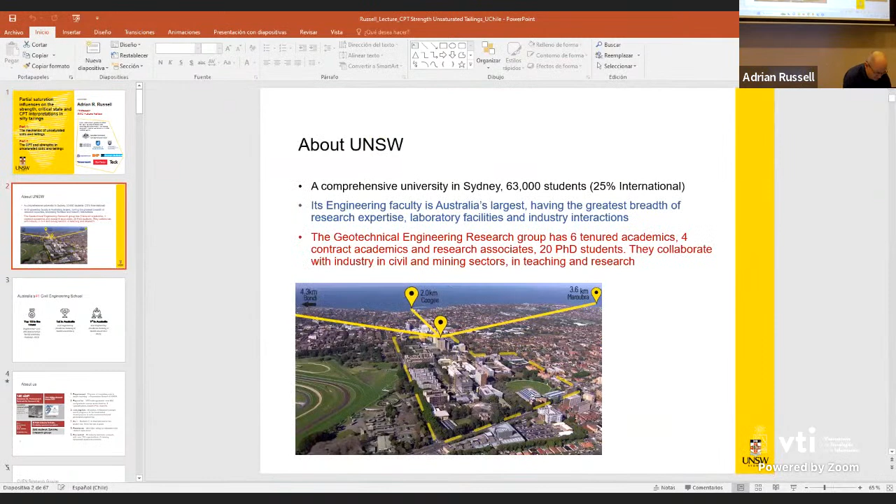So I'll make this full screen. My university, the University of New South Wales, is in Sydney. We have around 63,000 students. This is typical of a big university in Australia, 25% international, and it started as an engineering university, so civil engineering is one of the foundation schools of that university. It's very near the beach in Sydney, so it's a very nice place to visit, and you're all very welcome.

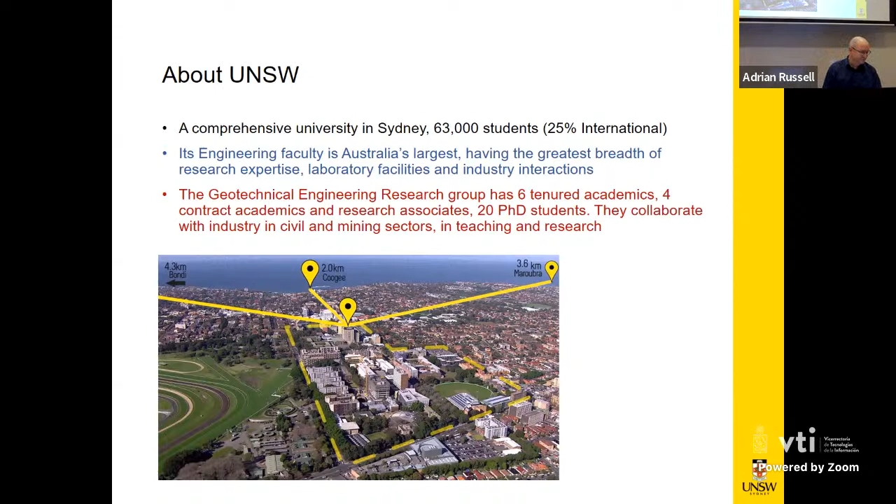We are very proud of our rankings. Globally, we are consistently first in Australia for civil engineering, and usually in the top 20 in that discipline according to the various rankings as well, in the world.

The university is quite young, it's 73 years old, but our school is quite big. We have 1,600 undergraduate students, 800 master's students by coursework, and around 200 PhD students. In the geotechnical engineering group, we have around 6 tenured academics and some others as well. We focus on several research areas, but the ones we're most famous for are unsaturated soil mechanics, that's number 1, and also number 5, our numerical analytical modelling expertise, which is also very highly regarded internationally. We also work in other areas as well.

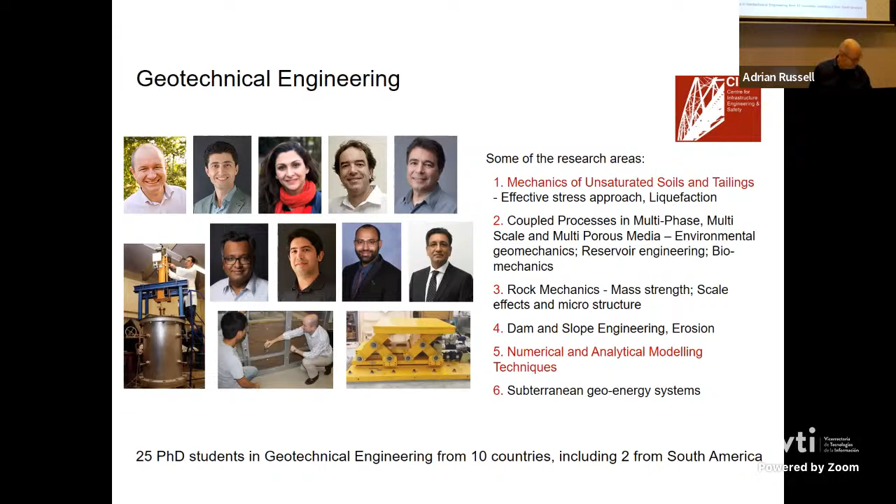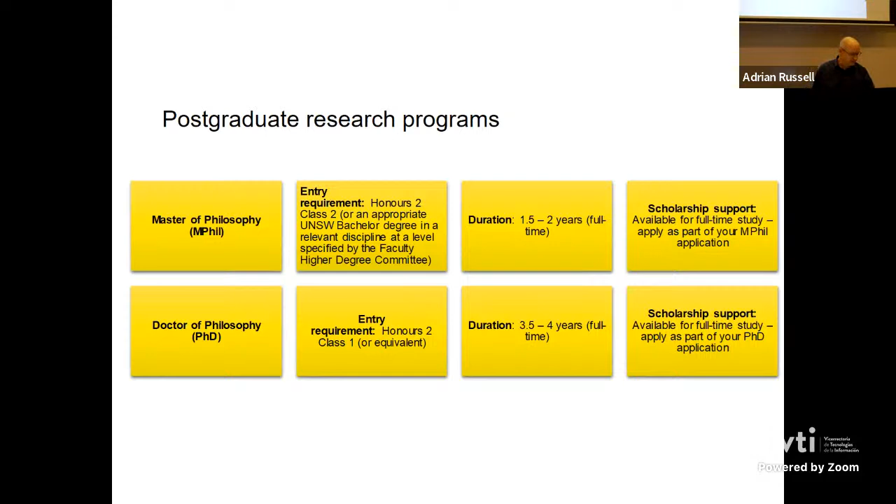In the geotechnical engineering group, we have around 25 PhD students from 10 countries, including South America, and more are always welcome, so please reach out to us if you would like to come and visit. Our PhD program is normally 3.5 or 4 years, but students need an honours 2-1 or a first class honours degree to come in. We also have a Masters by Research program, much shorter, only 2 years, but we can also do partnership-type research with other universities. So you're always welcome, it's a nice part of the world.

So let's get on to the technical side of the talk. I'll talk about what unsaturated soils and tailings are, and highlight why research on this is very important in the context of tailings. Then I'll go through some of the methods we use: the effective stress, strength, suction hardening, water retention, and what you can do in practice to apply these concepts very easily.

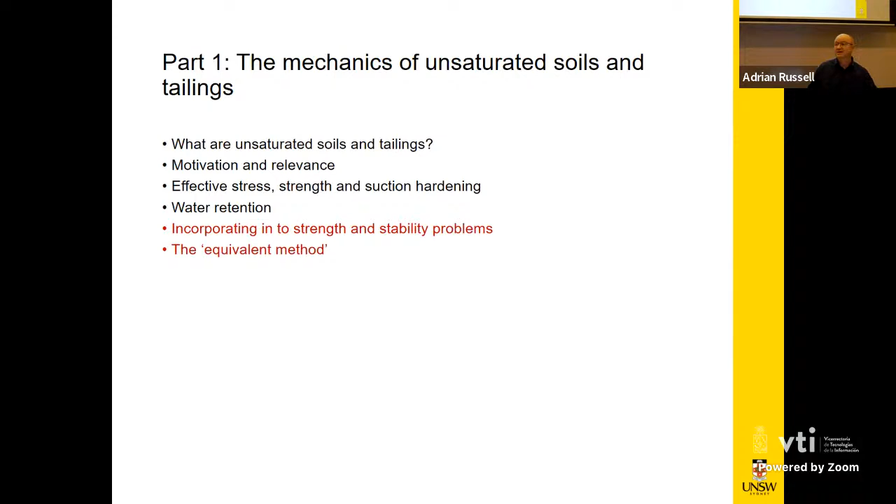So an unsaturated soil or tailings is one where you have solid particles plus air and water in the pore space. They are widely dealt with and encountered in many civil engineering applications - slopes, dams, compacted soils - but also in the mining sector: ores, tailings deposits, dry stacks are always or usually unsaturated.

The behaviour is influenced by suction as well as the presence of air in the pore space. Those two things do different things to the way the tailings behaves. Suction, for example, is a capillary action and it pulls particles towards each other, increasing contact forces. It increases the effective stress and it increases the strength.

The presence of air also has a significant but quite separate influence. It means that the tailings is compressible during a fast deformation event. Air is very compressible, much more so than water. So when you have some inside the pore space and you push a cone through it, you cannot assume a constant volume condition. This applies during cone penetration testing or any fast deformation event like an earthquake or leading up to liquefaction. You get volume change, and that's very important.

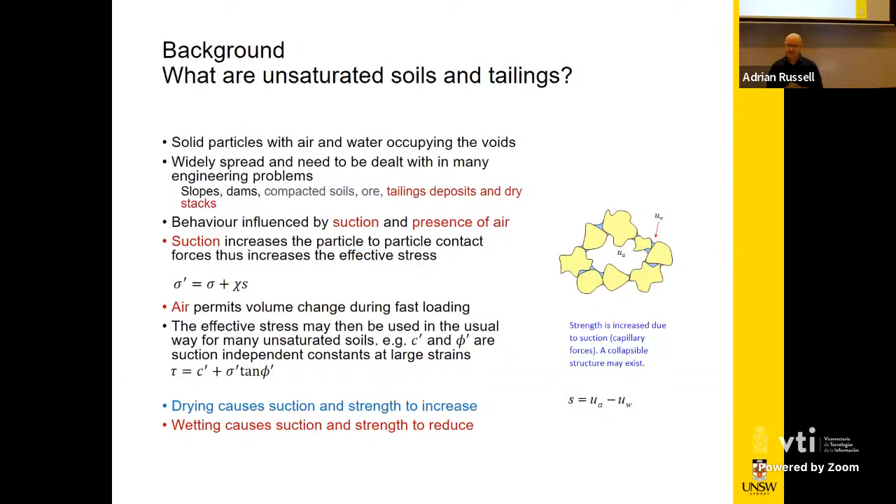Suction is caused by a difference between the pore air pressure and the pore water pressure. The air pressure is always larger than the water pressure, and they come into equilibrium through a curvature of the air-water interface. The difference between the two is what we call suction. Air pressure is usually atmospheric pressure, so the water pressure is negative - it's in tension, and it literally, through this interaction, pulls the particles towards each other, increasing contact forces. There are many obvious examples where you can have a negative water pressure through this capillary action, and this is something you can see in the laboratory.

If you have a large diameter glass cylinder where the water pressure is just hydrostatic, so from that red line and below, the water pressure increases with depth. But in the small diameter tubes, the curvature of the water surface pulls the water upwards and holds it in tension in this region here. And then once you reach this level of the large diameter tube, the water pressure is zero, and then it becomes positive below that line.

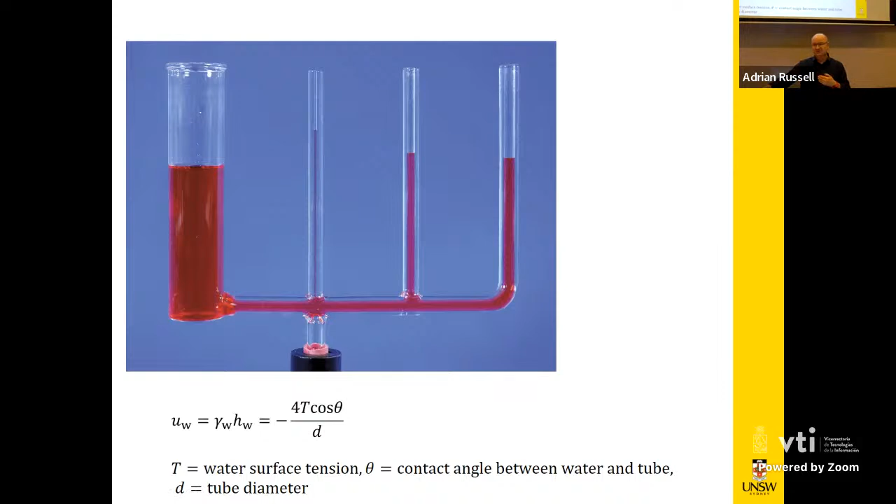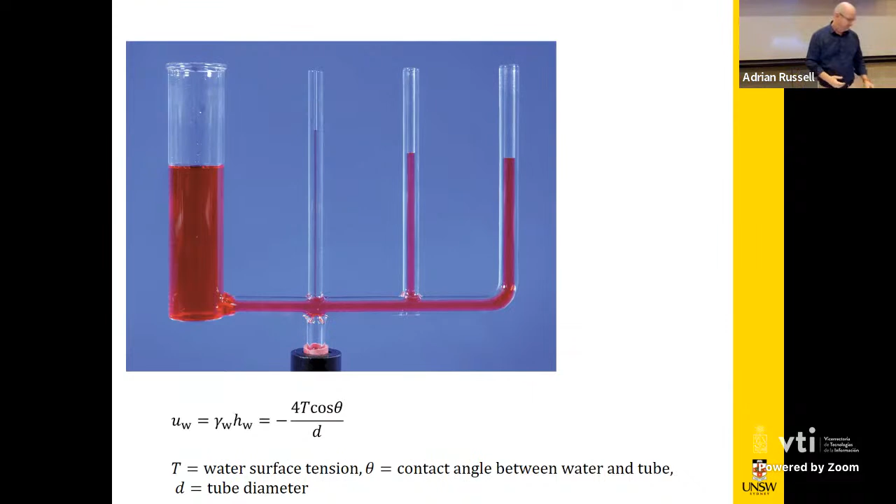And the same thing happens inside a soil or a tailings. There are places where the water is in tension through this capillary effect. So partial saturation is very important inside tailings storages. Tailings we like to dry out as much as possible, sunshine, and that increases the effective stress and the strength. But then if you deposit more tailings on top and build your structure up and up so it goes higher, you can have these buried sections where the tailings is partially saturated. And when you do your cone penetration through the structure, you can be pushing through these unsaturated sections.

And obviously above a phreatic line as well, you can expect to have partial saturation in significant sections of that. To give you an idea of scale, in a 30-metre high tailings impoundment, you can have a phreatic surface that might be 10 metres below ground surface. So you can have maybe 5 or 10 metres above that where it's partially saturated. And even below that line, there can be another 10 or 15 metres of different localised areas where you have partial saturation. These sections near the embankments especially are critical to stability, so they need to be characterised and dealt with in stability analysis to get an accurate answer.

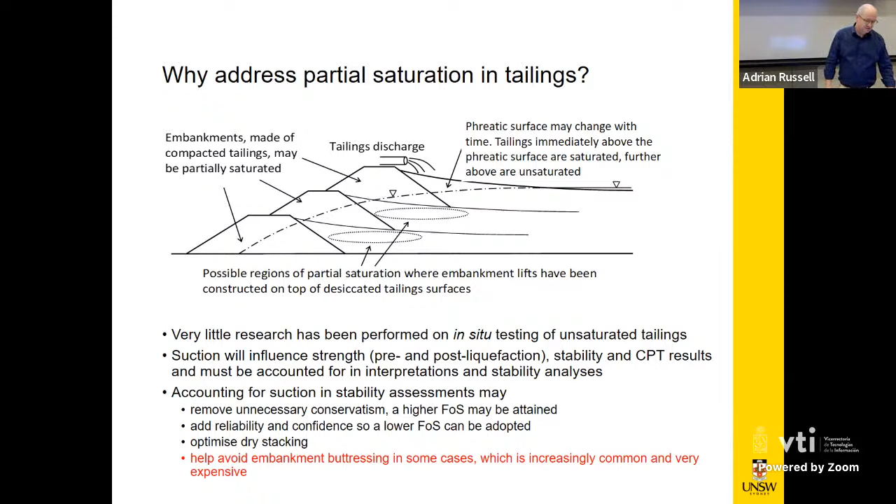Buttressing is becoming a common solution in the mining sector to minimise the risk of failure of these structures. But I'm wondering if the engineers who are designing these buttresses have properly accounted for the suction inside the tailings dam, because what it does is elevate the strength and increase the factor of safety. And I know in many cases they haven't done this fully, so they're perhaps designing a buttress that is bigger than what it needs to be, or perhaps unnecessary entirely. So it's important to put that unsaturated soil mechanics into the analysis to get a cost-effective and accurate solution.

So here's an expanded form of the effective stress. Suction is the difference between pore air and pore water pressure - there's that chi parameter. But we also have an air pressure part over here on the left. So we have a total stress minus the pore air pressure, and we call that a net stress. Normally the pore air pressure is atmospheric, and we take that as our datum, so it is zero. But sometimes that air pressure increases and we have to account for that. So you need to be aware of this full expression.

For dry conditions, the suction disappears and you just have the usual equation where your effective stress is equal to the total stress. For a saturated condition, chi is 1, there's no air present, and your effective stress equation becomes identical to what we use routinely in undergraduate engineering. And then for unsaturated conditions, you have this net stress plus chi-s as our effective stress definition.

Sometimes chi is approximated to be the degree of saturation. That is reasonable sometimes. In other times, it's a very bad approximation. So just be very careful of doing that.

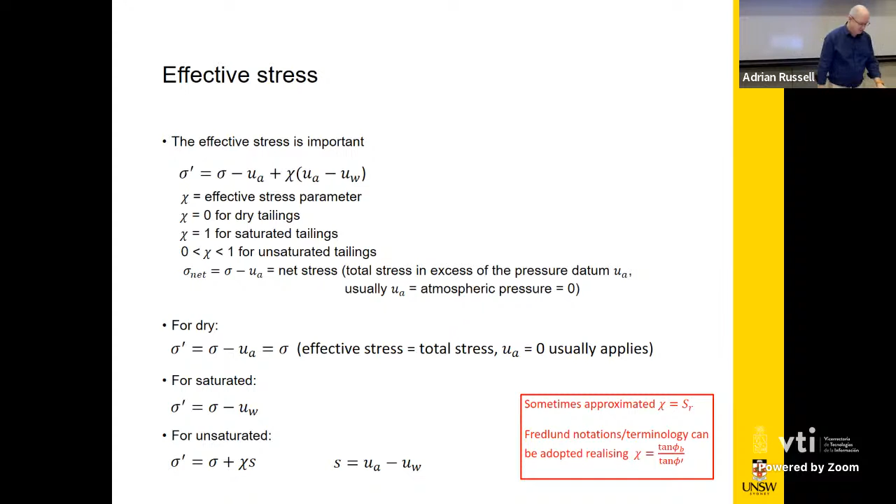Now, here's some typical stress strain responses of a decomposed granite when it's saturated and unsaturated, and this highlights what suction does. The first lines I want to show are these - let me put a pointer - this one here. These are for saturated, loose samples. You get the classic smooth increase in stress with strain, no surprises there, and you get volumetric compression as you shear the sample. The void ratio of those tests was around 0.4.

Now, these other two samples are for when the void ratio is a little bit higher, around 0.47, but they are now unsaturated. They have a suction of 50 kilopascals. Look what happens - you get now a very different response. You get a peak strength and then some softening, and it's looking much like a dense material, even though it's looser than those saturated tests we talked about to begin with. And that is due to a phenomenon called suction hardening.

Suction doesn't just increase the effective stress, it also hardens the soil fabric through a shift of the normal consolidation line or the critical state line. So it does two things to the mechanics.

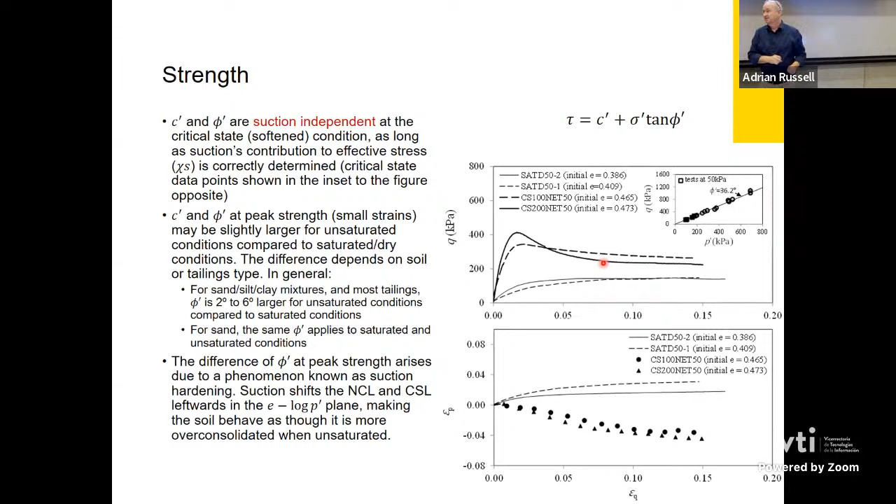This is the suction hardening phenomenon here. This is the saturated normal compression response, for example, initially quite stiff and over-consolidated, and then you move on to your normal consolidation line. When it's unsaturated, same sort of thing happens, initial stiff response, but the normal consolidation line is now over here to the right.

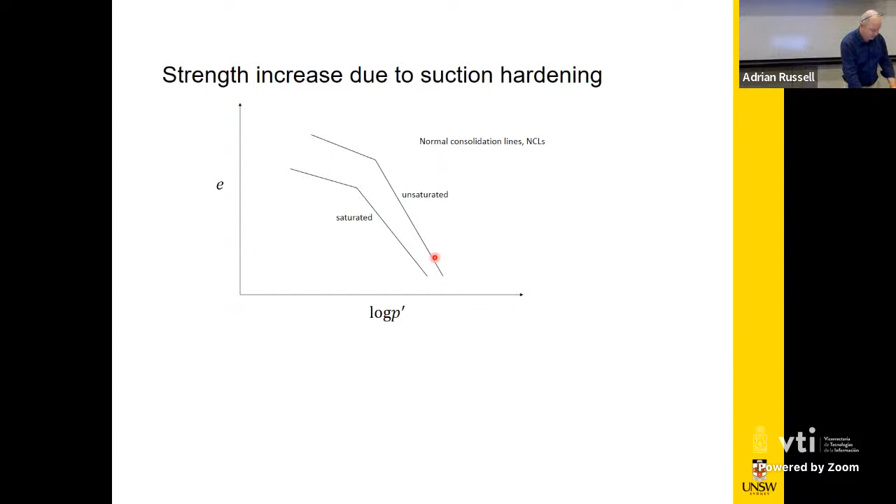It has moved due to suction hardening. Hardening controls the size of the yield surface, so your yield surface now has become larger through this phenomenon and the shift of the normal consolidation line. And we see the same with our critical state lines - they also move due to the presence of suction by the same amount as your normal consolidation lines.

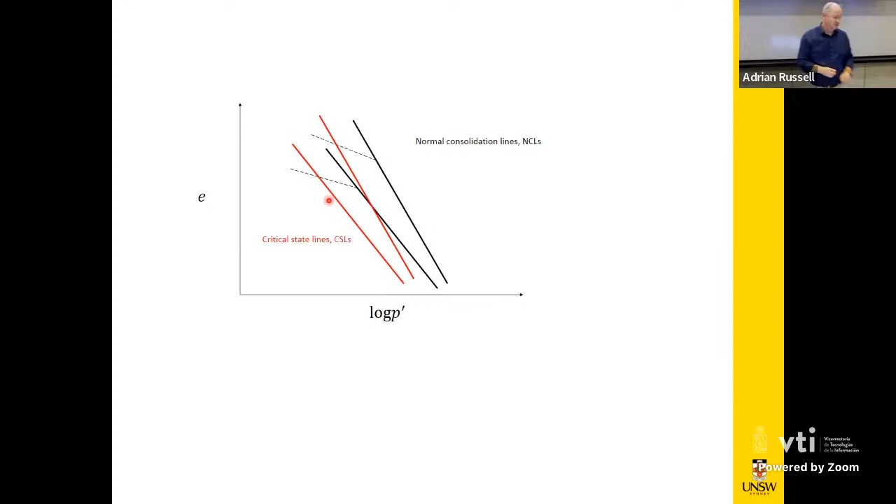So you need to put this into a mechanical framework to deal with it. These are some real critical state lines for two tailings on the left-hand side there. The saturated critical state line is through here, but when suction is present, and this is a suction ratio of 50, the line shifts quite far upwards and becomes steeper. And then as suction increases further again, it moves. So you get this suction-dependent location of the critical state line, and another example is just shown below there.

So this takes sophisticated and specialist laboratory testing to characterize, and we're very mindful that that is not routinely done in practice. So we try and give advice and guidance that doesn't require this to be incorporated into the mechanics, but sometimes it's unavoidable.

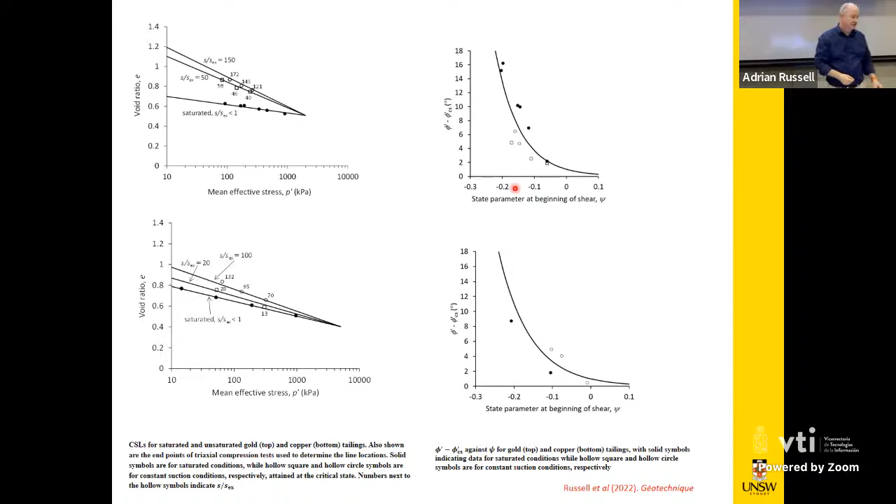These are just some strengths in excess of critical state against state parameter, and you can see that the saturated and unsaturated responses are more or less following the same trends - this is the Been and Jefferies state parameter. But the critical state line used in its definition is the shifted critical state line. So again, it's difficult for a practitioner to quantify the state parameter of an unsaturated material.

Now, determining Chi-S, which controls effective stress and strength, is important in stability problems. It requires knowledge of what we call the water retention curve or the soil water characteristic curve. This is a signature of any soil or tailings and is one of the first things that we try and measure in a laboratory. It tells us a lot about the mechanics of the material.

Generally, when you have a saturated material, degree of saturation of 1, as we increase suction, it stays saturated more or less until you reach a critical suction value called the air entry value. That is the suction value large enough to break the capillary bonds or capillary forces that exist between the soil particles and enables air to enter the system. Then it rapidly desaturates as you increase suction more and more.

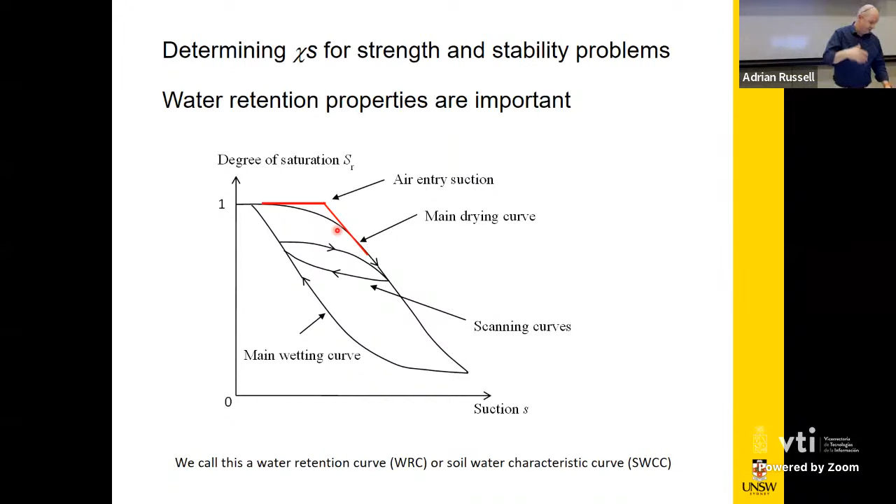But if we get to some point here and then wet the material, so reduce suction, it moves along what we call a scanning curve and then intercepts the main wetting curve and rapidly moves up to a nearly saturated condition. So we have a main wetting curve down here, a main drying curve, which is out on the right side bounding all the data, and then a whole lot of scanning curves that zigzag back and forth between the two as you transition from wetting and drying through normal seasonal moisture variations or some prolonged wetting or drying events.

But the beautiful thing about tailings and many soils, for that matter, is when you take a double log of the degree of saturation versus suction, you see straight lines form. That simplifies the mathematical expressions for these water retention curves, and that's what I've been using through all this research.

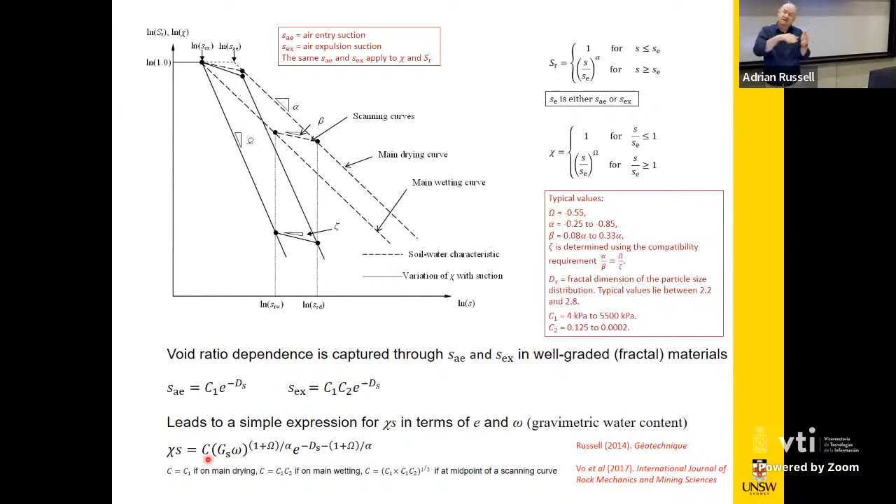But what these expressions let us do now is do some mathematical manipulations and show that chi-s, for example, can now easily be determined using knowledge of the gravimetric water content and void ratio. All these exponents are now just slopes of these different curves in this plane. The multiplier C depends on whether you're on the main drying curve, so you're undergoing a drying event, or the main wetting curve, if the material's been wetted, or sometimes if you're halfway between. For example, if you're exactly halfway between the two, this is what that constant would be.

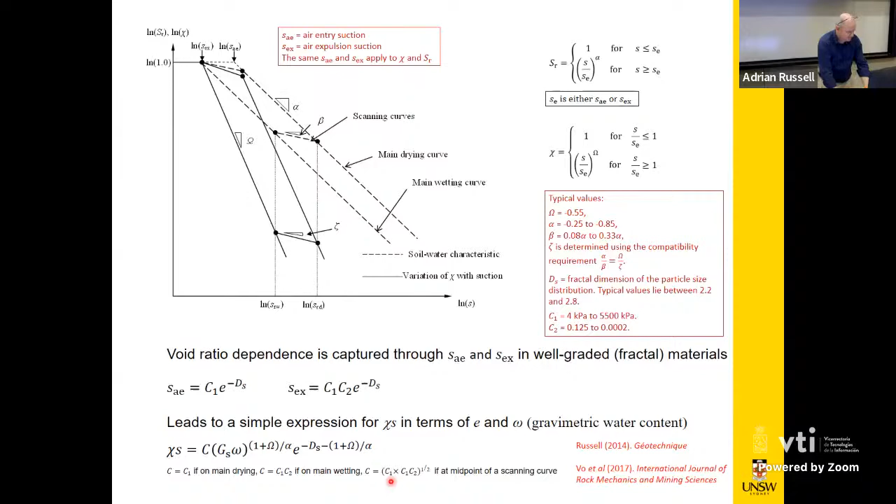What is a fractal? Well, it's a special pattern to the grain size distribution that is formed naturally by decomposition of rock, or it is formed artificially by crushing and grinding processes. And sometimes nature just has crushing and grinding involved anyway.

So you have this sort of procedure that results in a particle size distribution where you have a very well-graded material and the particles can become perfectly packed. You can have the big grains, and then in between them, the next biggest grains are inserted into the void spaces. Then in the spaces that remain, you insert the next possible biggest grains and repeat all the way down, and you end up with this fractal distribution of grain sizes.

How do you know if you've got a fractal in your soil or tailings? Well, you take the double log plot of percentage passing and grain size, and if you see a linear segment for at least about 2 log scales, then you've got something that's a fractal or very close to it. The slope of that line in the double log plot you can easily determine, and then 3 minus that slope gives you your fractal dimension.

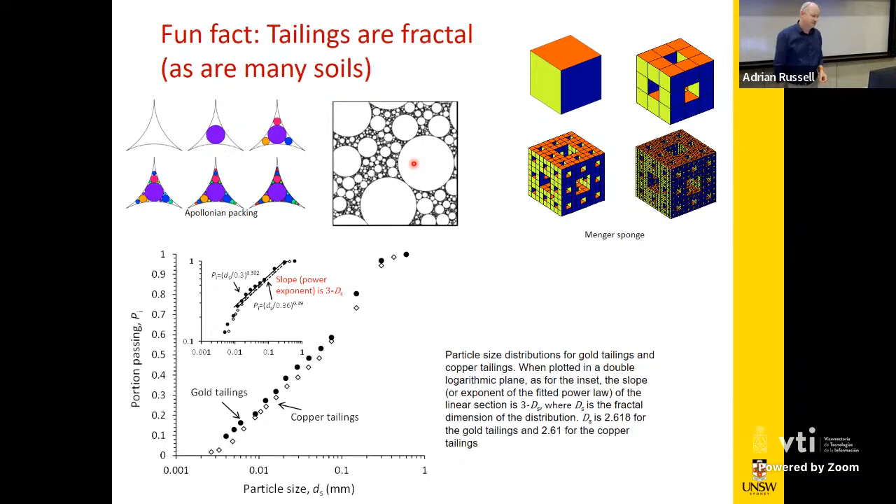I just learnt today that Santiago gravel is a beautiful soil that you have to deal with here all the time, and it happens to be a perfect example of a fractal soil. I did this just an hour ago: I plotted percentage passing against particle size for your Santiago gravel, and notice in the double log plane, you get almost a beautiful, perfect straight line. The slope is 0.44, so the fractal dimension of your Santiago gravel is around 2.56.

So it looks something like this image in the bottom left, and I'll come back to that at the end of the presentation with some other estimations. I'm guessing this material is from the mountains, but it's alluvial. But what turns the rock into soil in the first place? Maybe there's some grinding process through glacial action or landslides coming down or something, and that process, that grinding and churning up of the soil, has caused it to be perfectly fractal, and then the water has just deposited it.

Yeah. They compact very, very easily. They're very easy to work with. Decomposed granites all over the world are fractal as well. Anyway...

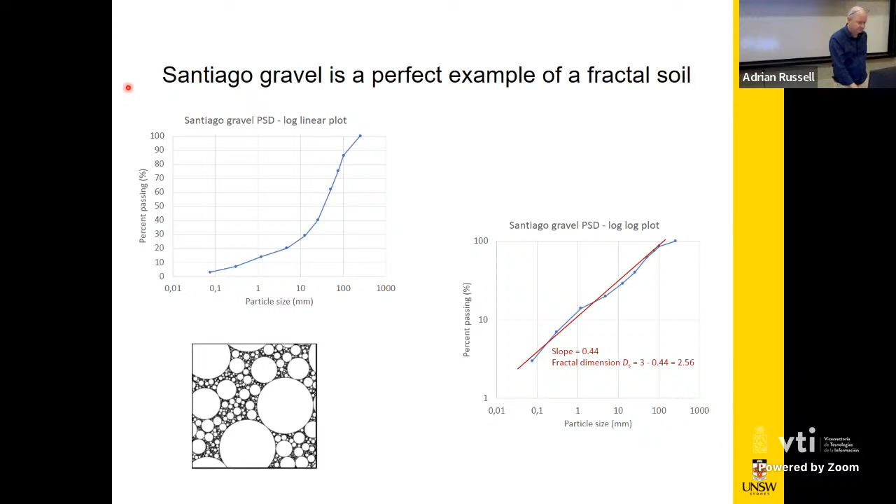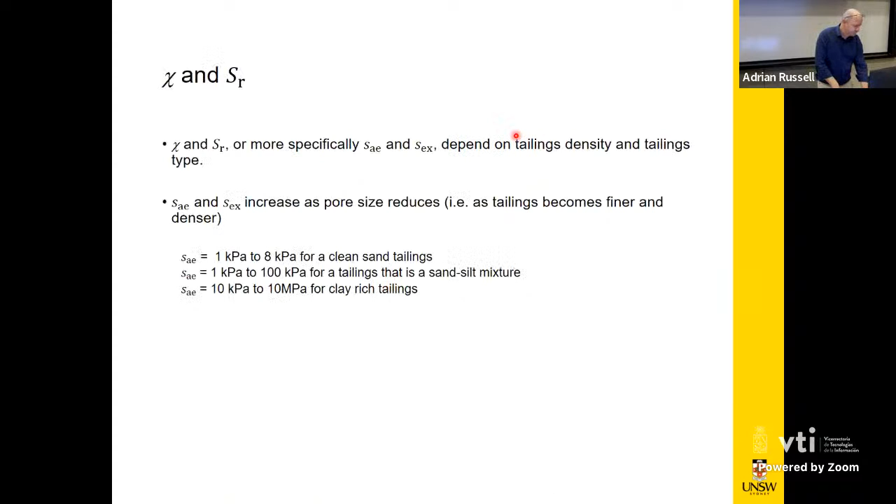We can jump ahead of that. Okay, so let's now imagine this material deposited in a tailings dam or impoundment.

You can have a phreatic surface. Below that, everywhere your water pressure increases linearly with depth, hydrostatic. But immediately above the phreatic surface, through capillary action, the water is sucked up into the pores and is held in a more or less saturated state, but in tension. So you can have a negative hydrostatic water pressure, and the extent of that capillary rise section depends on your air entry value divided by the unit weight of water.

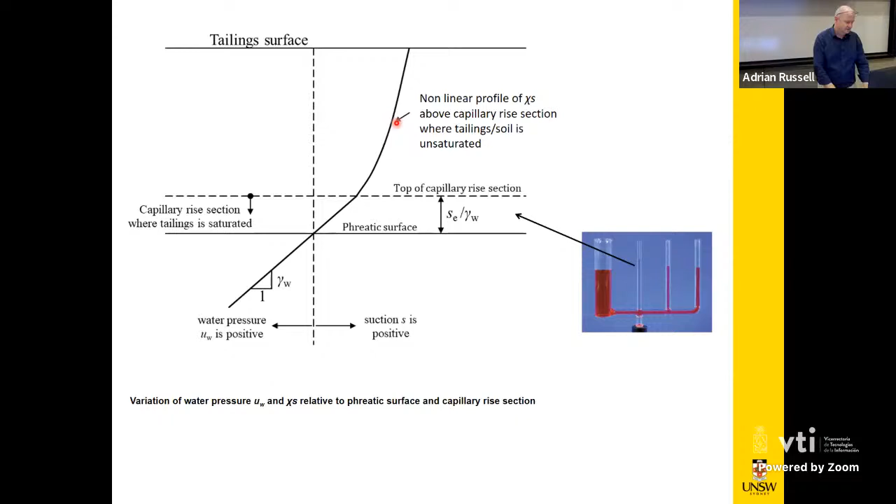If it's caused by a drying process, that is, if your phreatic surface is gradually lowering, you're gradually drying out the tailings, it's the air entry suction that controls the height of the capillary rise. Conversely, if you're wetting the soil, for example a rise of the phreatic surface or some rainfall event, the wetting means that the air expulsion value is critical in the height of the capillary rise. Immediately above that, it deviates from linearity, and you have a chi-S profile that is also a tensile phenomenon, but it departs significantly from the hydrostatic condition.

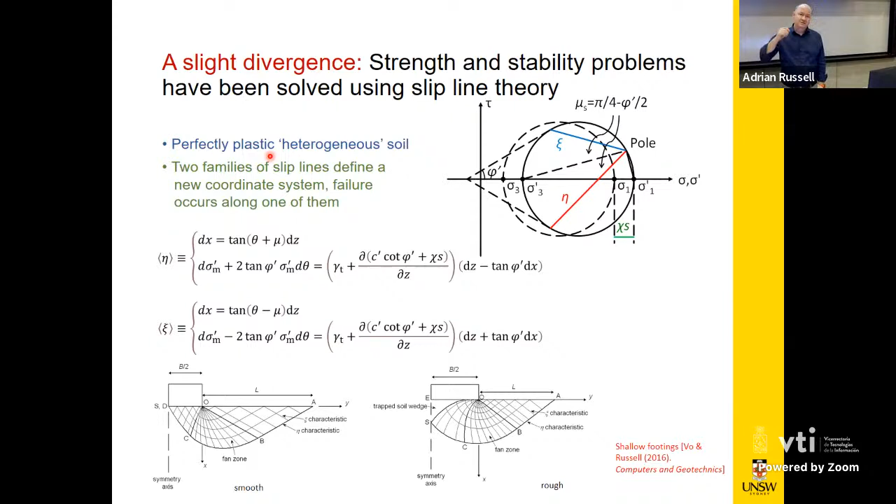Okay, I'll quickly divert and talk about strength and stability problems generally. This is relevant to all types of civil engineering. We solved the unsaturated case using a slipline theory, so we can look at things like bearing capacity of footings, stability of slopes, earth pressures on retaining walls, by putting linear relationships for chi-S with depth into the governing equations.

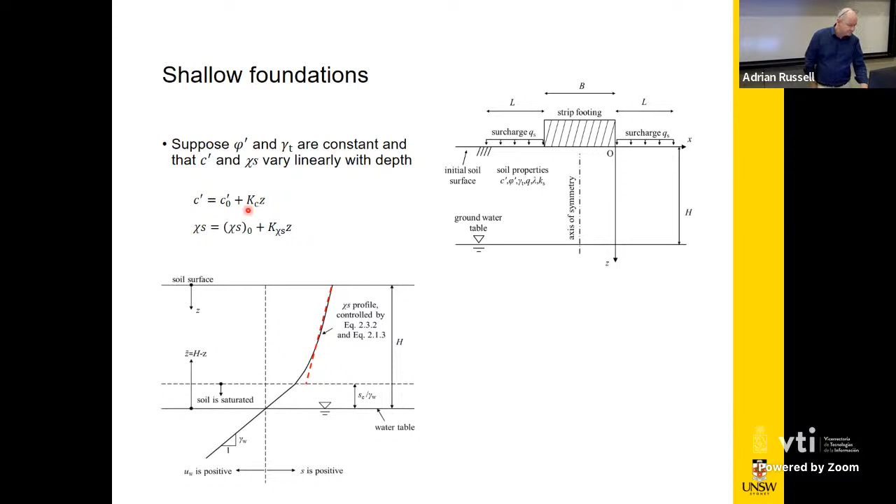So if our chi-S profile can be approximated as a straight line with depth, it has a value of chi-S0 at the ground surface and then might reduce with depth. If you can approximate it using a straight line, we can go forward and do some really nice things. Likewise, our cohesion can vary with depth as well. And we found when solving these problems, the dimensionless groups which govern stability have a repeating appearance of suction inside them.

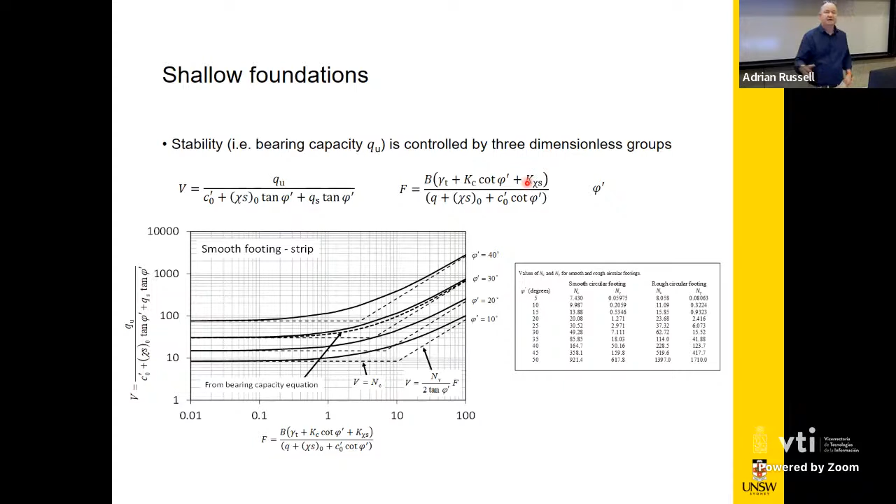The governing dimensionless groups here show that there's a type of cohesion in the non-dimensionalization that depends on the value at the ground surface plus the chi-S at the ground surface multiplied by tan phi, and then there's a surcharge part. But there's also a unit weight part to the dimensionalization. You've got your gamma plus the rate of change of your cohesion plus the rate of change of your chi-S with depth, and they all sort of act together in the same way as well. And this gives rise to what can be called an equivalent method.

You can put suction and its variation with depth into your stability calculations using these simple equivalent expressions. Your equivalent cohesion is the value at the ground surface plus the value of chi-s at the ground surface times the tangent of the friction angle. And then your equivalent unit weight also needs to be defined as your total unit weight plus the rate of change of your cohesion and chi-s incorporated as well.

And that means that when using software like SLOPE/W or one of these other commercial packages, you don't need to deal with the unsaturated soil features at all. You can model it as a total stress problem and put suction influences into your cohesion and unit weight, and you'll get the correct answer from a strength and stability point of view.

This will ensure that the dimensionless groups which govern the problem do not change and represent those which are most relevant. Now, the chi-s profile that you put in must be representative of a worst case, so perhaps something to do with a wetting event involving the wetting curve in some way. It's very powerful. The assumption here is also that the chi-s profile doesn't change much during the deformation leading up to failure. And that is reasonably accurate when you have large air volumes in your soil or small degrees of saturation. We've done a whole lot of research confirming that.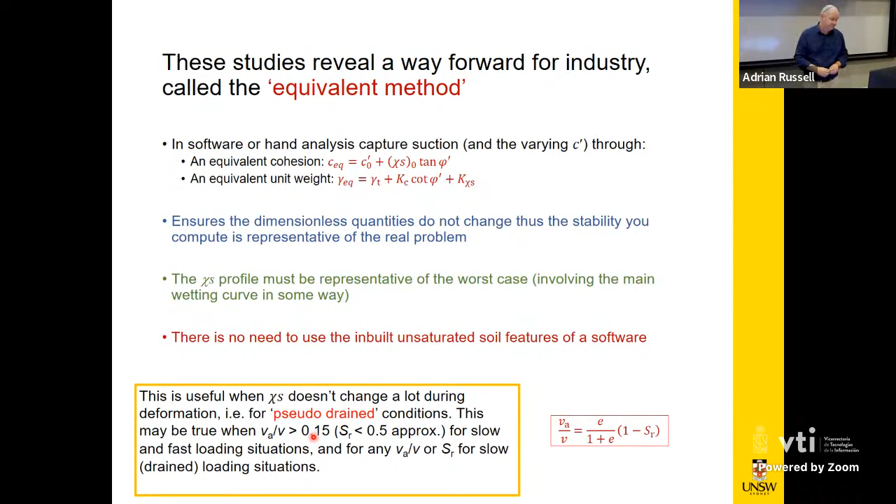So I get my students to do this, for example, using SLOPE/W. I give them an unsaturated soil slope. I say, well, these are the dimensionless groups that define the problem, the unit weights and cohesions. These are the real numbers here. There's a surcharge of 228. And this is the chi-s profile. So they can use this equivalent method to define alternate unit weights and cohesions, set the pore pressure parts to 0. Essentially, it's a total stress analysis inside the software. The dimensionless groups are identical, and you can then run the analysis.

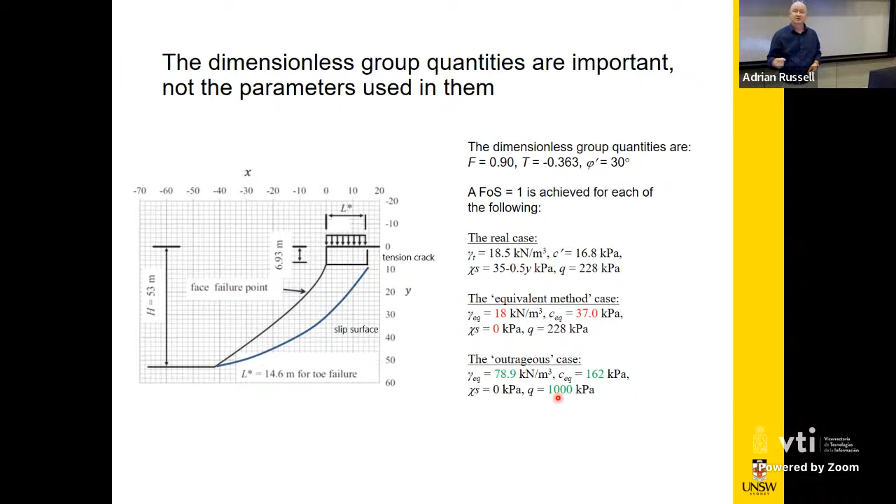I also get them to put in outrageous numbers, like a unit weight of 78. There's no soil on Earth that has anything like that. And then some ridiculous cohesion and surcharge that is a real departure from the exact numbers. But that doesn't matter. When you combine these parameters together, you get the same dimensionless groups as the original problem. So the mechanics are preserved. And when they run the stability analysis using all the different combinations of parameters, they get the same factor of safety. So it just highlights that the dimensionless groups control the stability, not the individual parameters used to make them up. This is a nice learning exercise for the students.

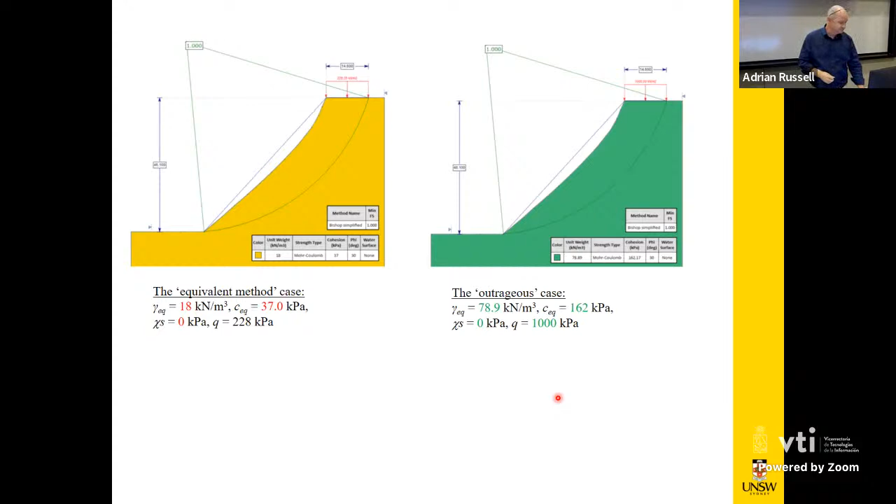Okay, let's get on to CPT. So I'm going to quickly give some background on what's been done in the past, highlight the importance of the drainage conditions, and then talk about applications and examples in tailings, and also finish up with some of the latest work we're doing on liquefaction, post-liquefaction strengths for unsaturated materials.

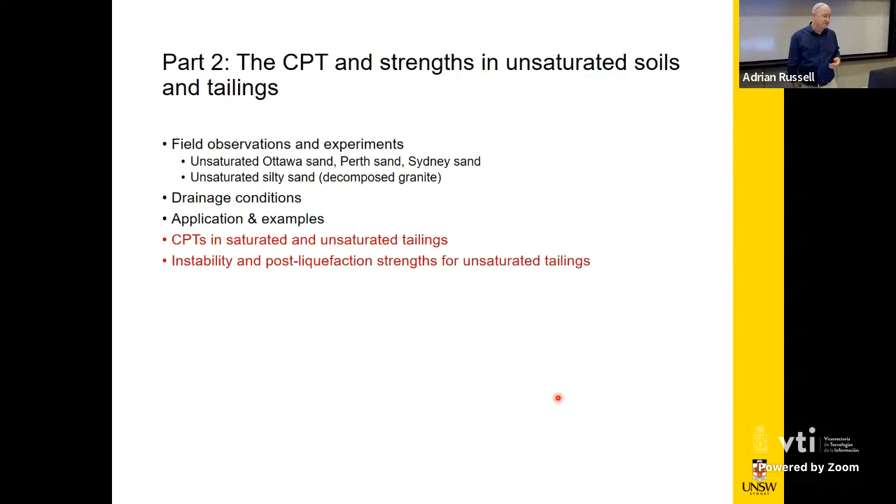So some of the earliest CPT work was in very primitive setups, essentially a compaction mold, just pushing small cones in. They're showing for a clean sand that when your degree of saturation is less than 10%, your cone resistance rises a lot through that capillary action.

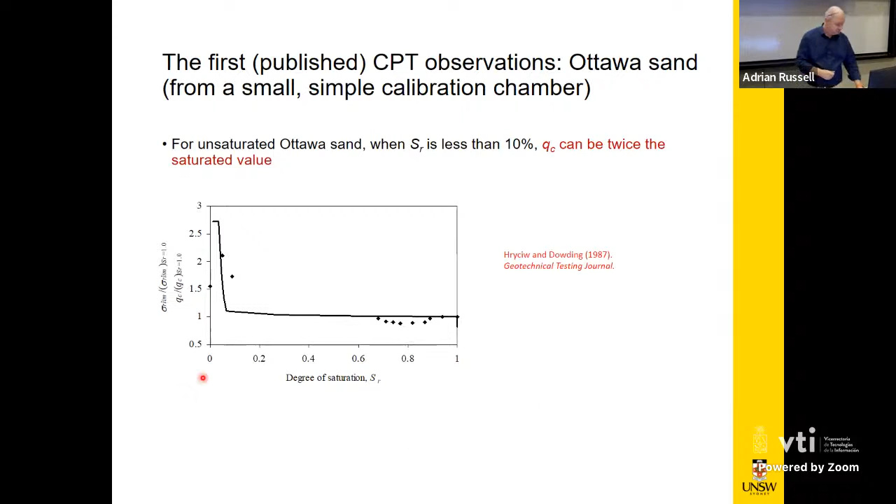More sophisticated work a bit later on, using larger cones at the end, at a site at the end of wet and dry seasons. You can see at the end of a dry season, when there's a large suction, your cone resistance is roughly double that at the end of a wet season.

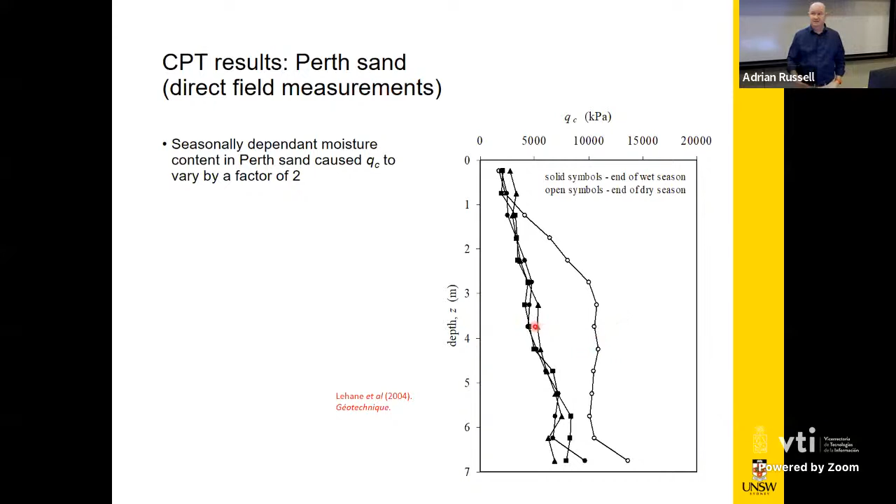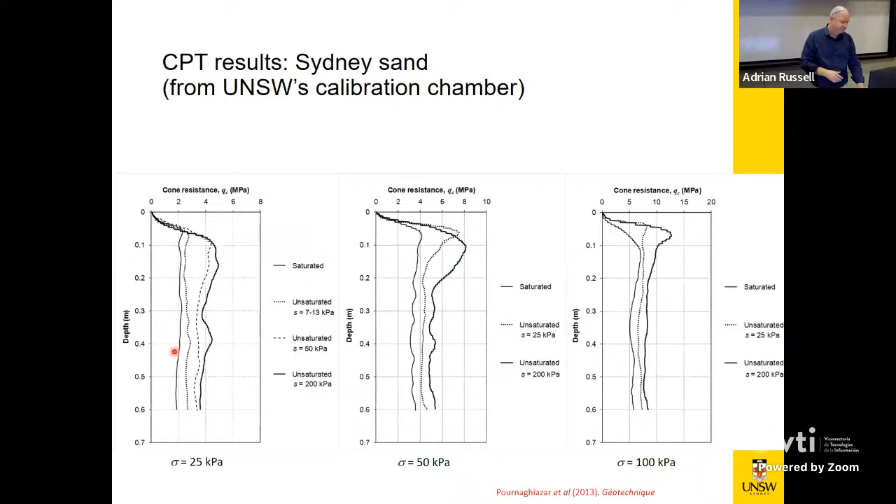These are some more results in a clean sand. On the left here, you can see that as suction increases to maybe 200 kilopascals, your QC is around 4 megapascals, whereas for the saturated case, it's only around 2 megapascals. You see the cone resistance is roughly doubled due to the presence of suction. We've done other tests on well-graded soils like a tailings. But anyway, there's a lot of evidence that suction does a lot to your QC.

But what is happening from a drainage point of view inside the soil or the tailings? Certainly from a practical point of view, we would like to assume that suction is constant, or chi-s is constant. That would really simplify the interpretations. It means that the chi-s which prevails around the penetrating cone is identical to what was initially present inside the tailings. That would be a great thing to assume if we could.

But realistically, when you push a cone quickly, chi-s might change, but we do know for sure the water content is constant. There's not enough time for water to drain in or out in most cases. So that is a constant water content drainage condition, if you like.

But sometimes the air can't drain out either. If the air is in isolated bubbles inside the tailings, as you push a cone, the air mass has to remain constant. We call it a constant mass condition. You have to remember that air is very compressible, so we can't say the air volume is constant. In fact, it's certainly not, but its mass is constant.

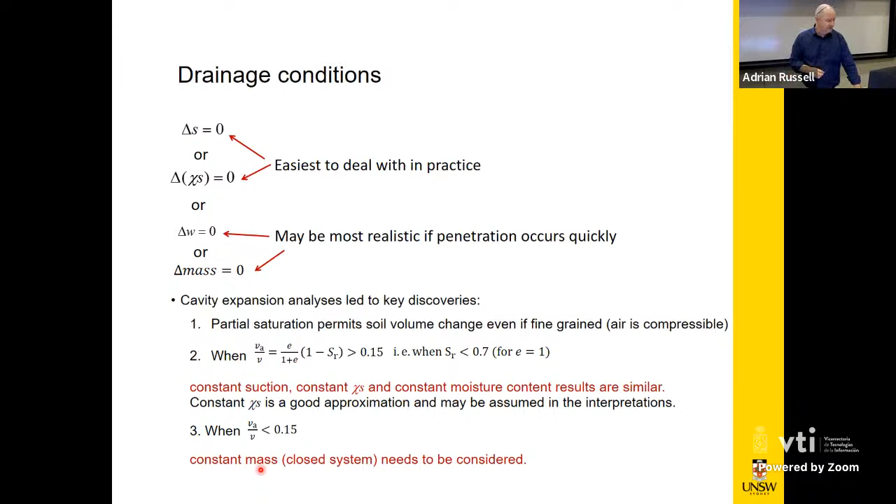I'll jump through that, but I'm running out of time here.

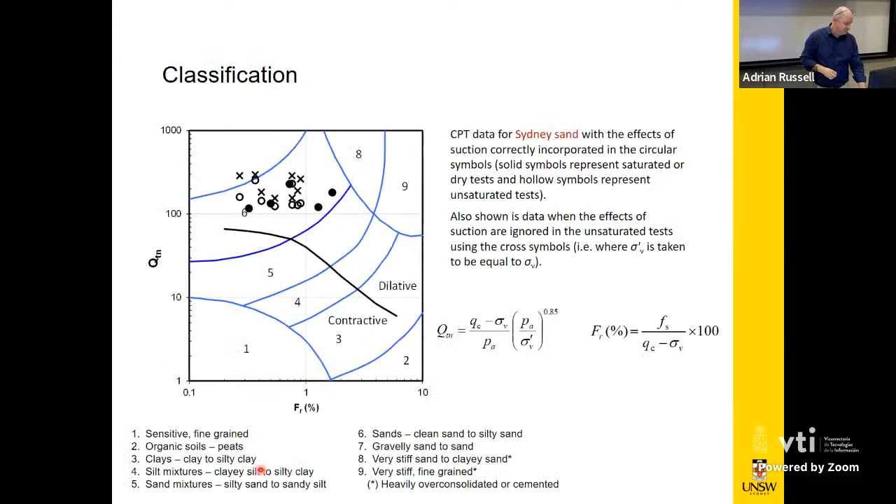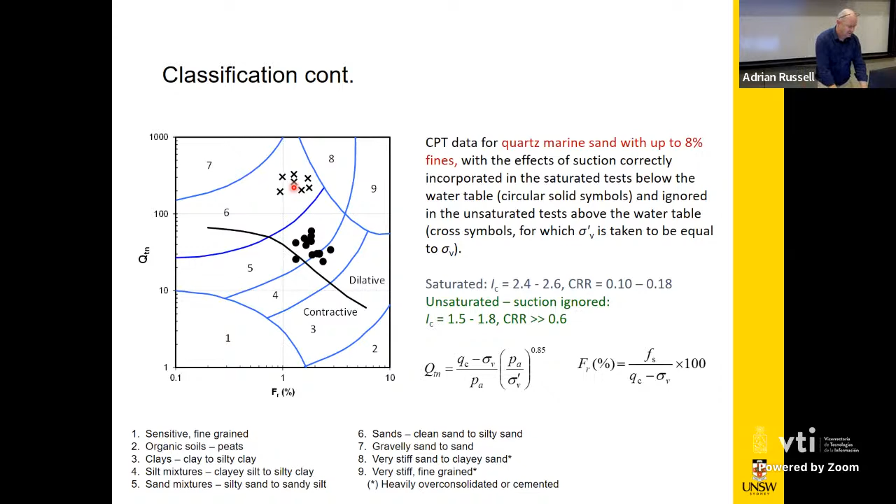Okay, now onto the tailings.

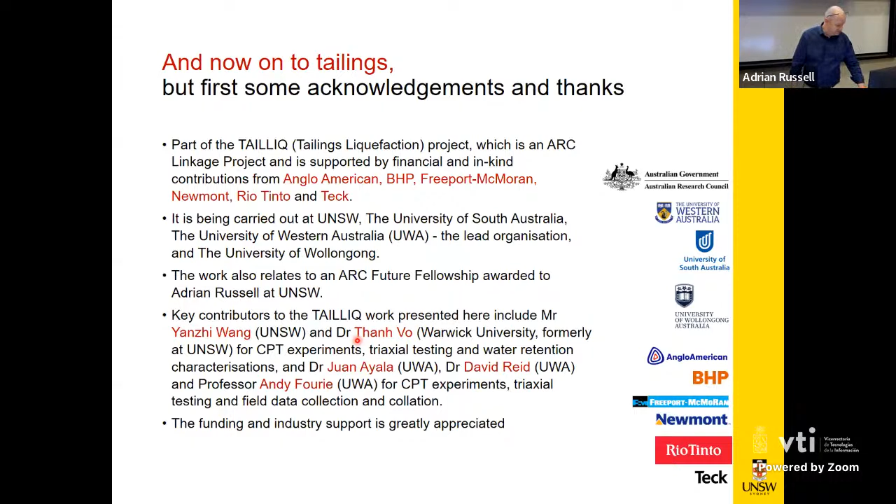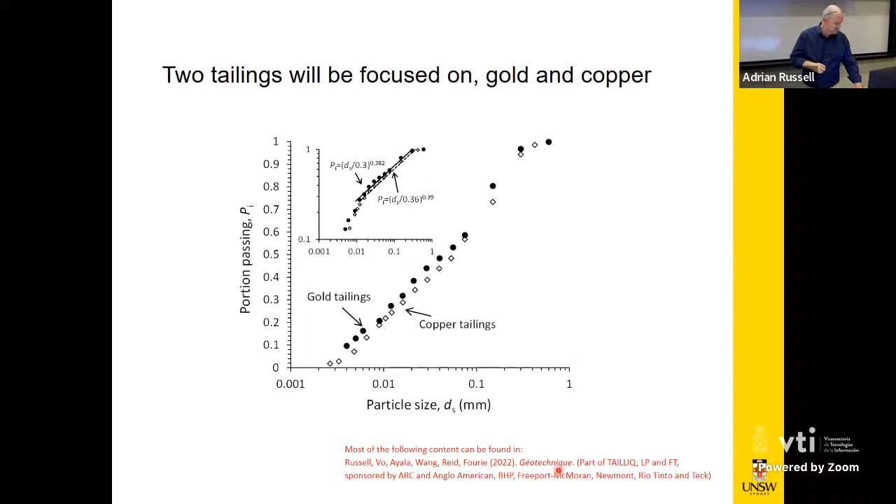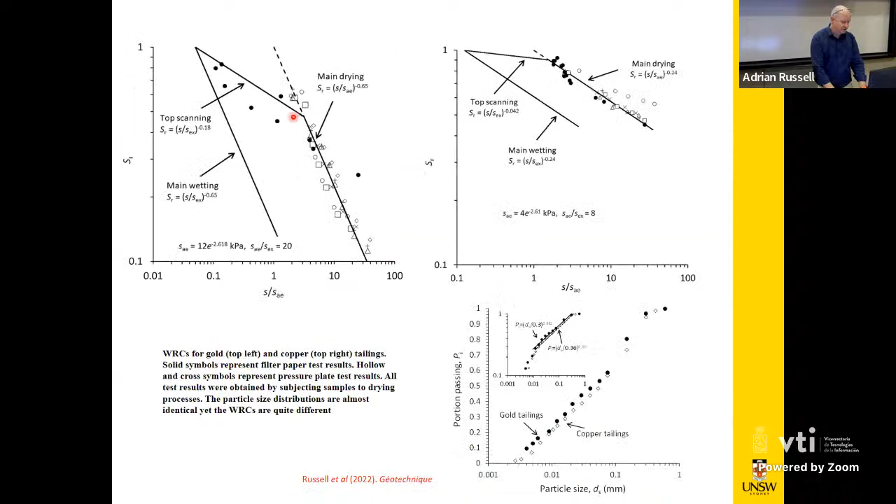I've shown these already. These are the critical state lines that depend on suction for the two tailings, water retention curves, and here are the cone results.

Using two calibration chambers, one large, one small, two or in fact three different cone sizes, and a whole lot of different penetration rates, we were able to discover a few things. In particular, we found uniqueness between a saturated drained cone penetration and an unsaturated penetration. The saturated results are the solid symbols, the unsaturated results are the hollow, and you can see they obey the same trends in this normalized plot.

That is because drained conditions prevail in both cases. The saturated tests were performed very, very slowly, so we knew drainage was complete. The unsaturated tests we performed quickly, but there was enough air present inside the tailings so that the volume change which occurred made the tailings look as though it was drained, or pseudo-drained. That's how we observe this uniqueness.

The state parameter for saturated cases is very simple to determine using the critical state line, but we had to account for the shifted critical state line for the unsaturated cases as well in defining that state parameter to see this uniqueness. The same was observed for the other tailings, uniqueness more or less for the saturated and unsaturated cases when we have large volumes of air present, larger than around 15% of the overall volume. It was only for lesser volumes of air, here 9%, here 7%, here's nearly 2%, that we see a departure from that pseudo-drained response.

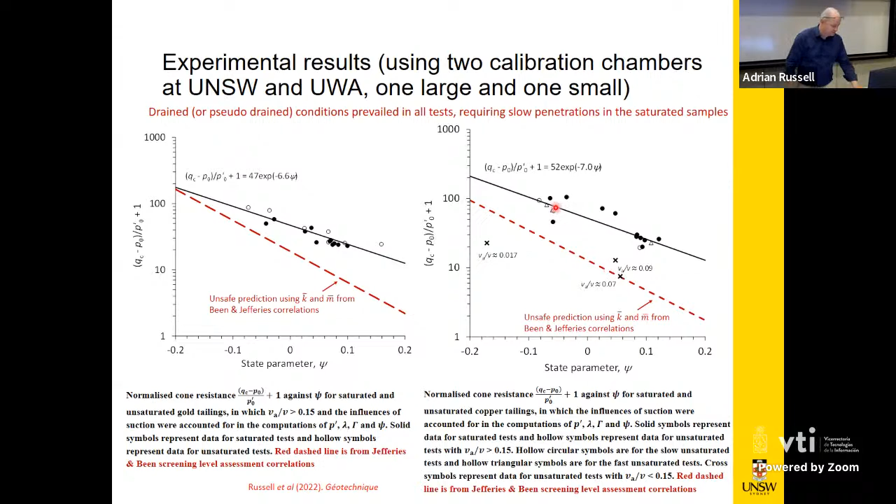Okay, and this is significant. This is where we have to apply a slightly different interpretation technique to the results. But when we have large air volumes, we see uniqueness with the saturated tests. What are the conditions required for uniqueness? Large air volumes, and we think 15% is that critical number where it suddenly becomes pseudo-drained. And we have to account for the shifted critical state line in the unsaturated state parameters. When it's less than 15% of air volume, we need to look at some partially drained, partially saturated phenomenon, and I'll get onto that in a second.

But also these two tailings being very silty, we had to do the cone testing very, very slowly to ensure full drainage occurred. If we did standard penetration rates, we would have partial drainage or possibly an undrained condition where we would see a departure and some non-uniqueness.

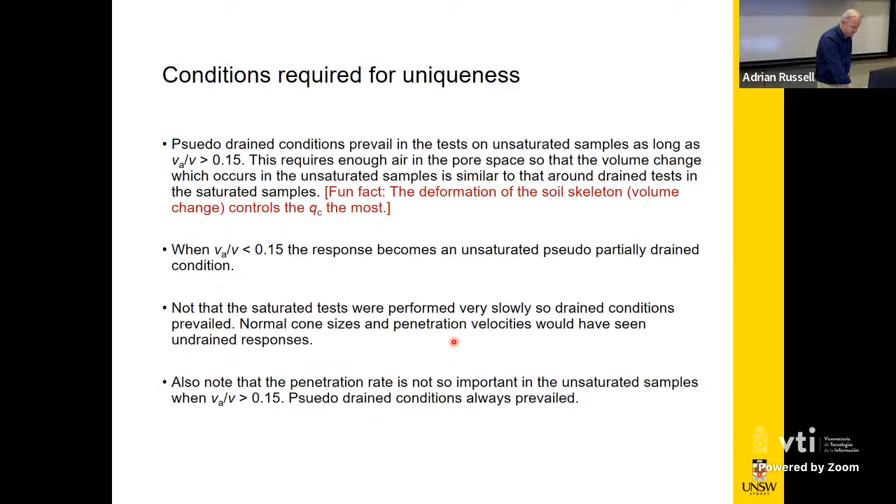An alternate presentation of the results is shown here, and this has intentionally taken out knowledge of the shifted critical state lines. So there's no reference to state parameter inside these, okay? But you can plot a normalised cone resistance using a total mean stress against a void ratio, and at different mean stresses and different gravimetric water contents, we see these straight lines, these families of straight lines form, and you get slightly different plots for the two tailings types.

I've shown this because this is something that a mine could determine for their particular site using their extensive data records of cone testing over many decades, perhaps, where they've got knowledge of void ratio, water content, cone resistance. Plot on these types of charts and you can construct a family of lines that help you interpret your data in the future.

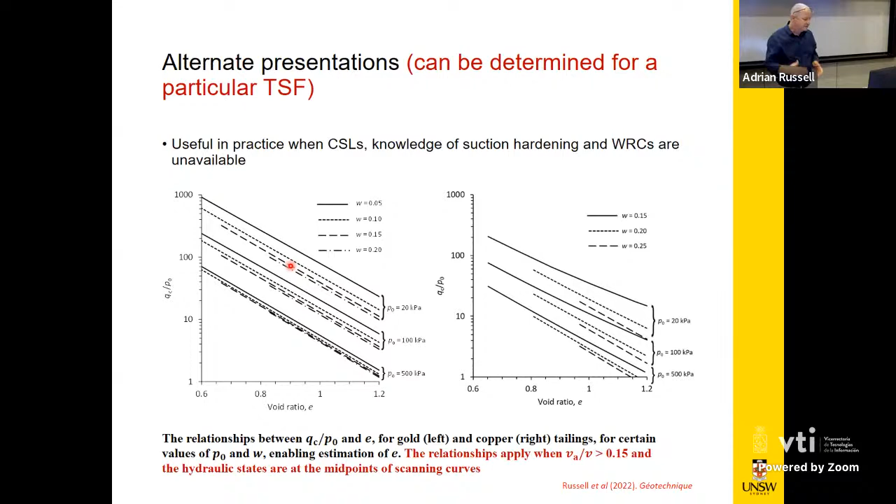I must also note that in constructing these charts, I assumed the hydraulic state of the tailings when unsaturated lies exactly halfway between your main wetting curve and your main drying curve. So it's not a drying event or a wetting event, it's something in between. We think generally most unsaturated soils and tailings lie somewhere in between the main drying and wetting curve.

Okay, there's field data that shows this. This is for some field monitoring of the soil slope over 2 years. The real hydraulic states that we measured were always located somewhere on, or close to, this red dashed line through here, whereas the main drying curve out here and main wetting curve out here, which we determined experimentally, were never really encountered in the field. So normal seasonal changes of wetting and drying, which are cyclic and change from one month to the next, mean that your state is always hovering somewhere between your wetting and drying curve, usually. So that's a reasonable assumption, practically speaking, most of the time.

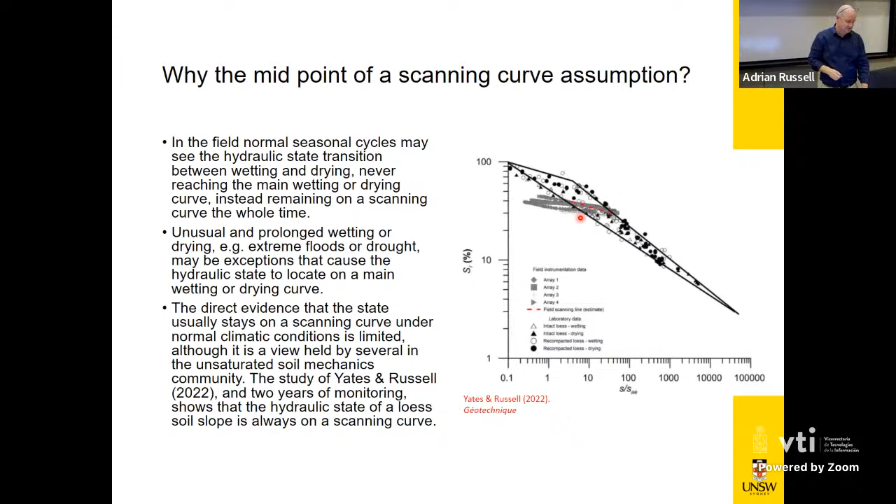Okay, let's look at some laboratory correlations and how we can use those to interpret field data. This is where we've got some cone testing in a saturated section of tailings, but we've used two different cone velocities inside the tailings. One is the normal 2 centimetres per second, where undrained conditions prevail, and the other cone result slowed down the penetration rate to 0.4 centimetres per second for a 1 metre section, knowing that drained conditions would prevail.

So if we look here at the CPT, the light grey one here is when the cone resistance was slowed down, so we have drained conditions, and the black one everywhere is undrained, where we have the faster penetration rate.

We can use those laboratory correlations, which are for drained conditions, to now determine the state parameter for this 1 metre section of the drained CPT. And then knowing the state parameter, we can relate it to the fast cone penetrations, which occur under undrained conditions, to determine a new relationship that applies for undrained conditions.

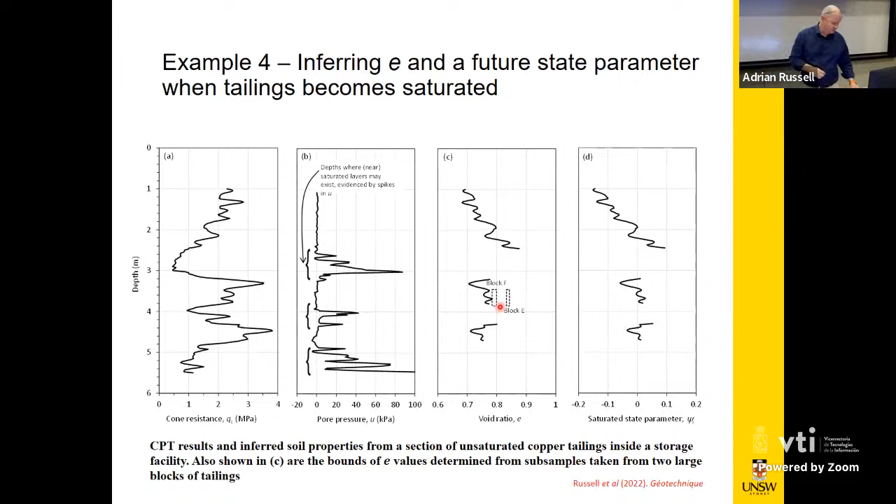I just want to go back to this figure because there is a section just above the phreatic surface where this particular cone was measuring negative water pressures reasonably well. And then it got to a certain point where the pore pressures became zero. So I'm guessing in this region here, it's possible you've got a saturated section with some capillary rise where negative water pressures are present, and the cone is reasonably well measuring those negative pressures.

And then suddenly, when it desaturates above that capillary rise, you have this zero pressure response. So you can make some reasonable estimates of extensive capillary rise sections and so on when you've got data that looks like that.

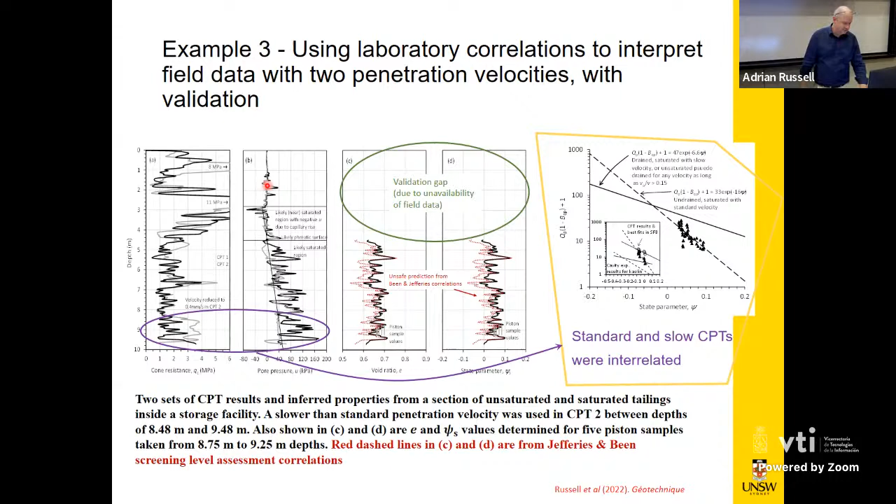Jump through that, I'll get on to strength and instability now. When you have, well here, degrees of saturation of 63% or larger, very loose void ratios.

In a closed system, rapid loading condition, you get a response that looks a bit like a saturated, undrained case, where you get some kind of increase and then a peak, some kind of instability condition, and then the strength reduces to some post-liquefaction strength, let's say, at larger deformations. And all the time you're getting volume change or a reduction in your void ratio inside the experiments. It's no longer a constant volume condition.

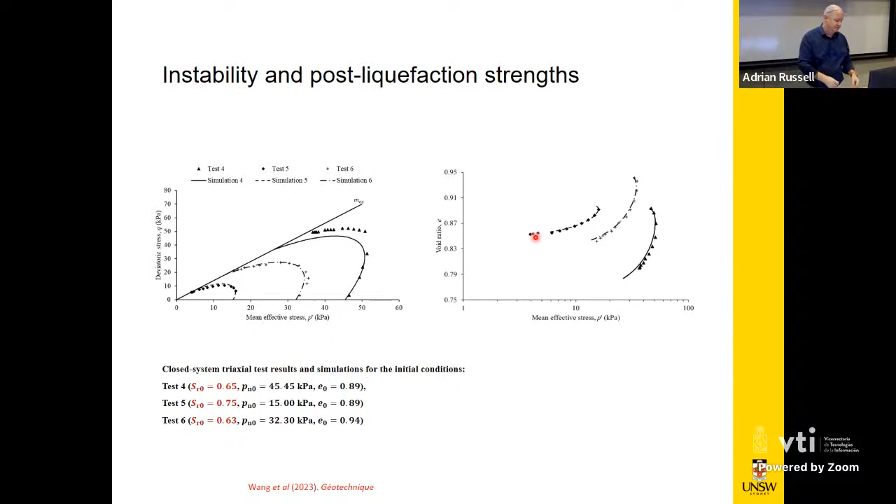So we did a whole lot of triaxials like this and tried to identify some trends between this post-liquefaction strength and initial state parameter. We also found that the instability line, that's the peak of those stress strain curves, depends very much on your degree of saturation. In fact, it becomes steeper as your degree of saturation reduces.

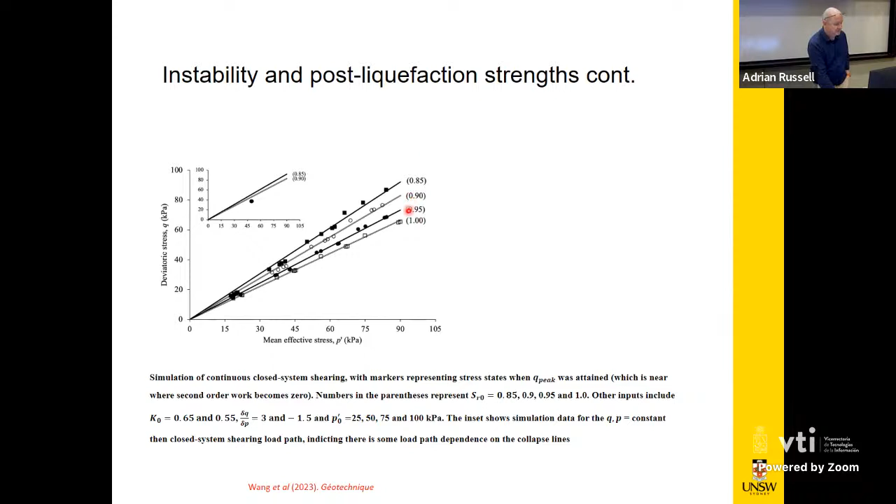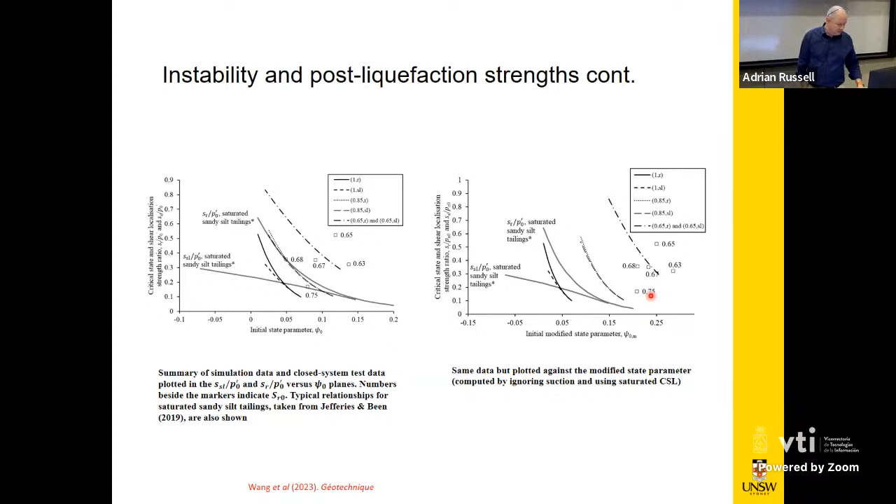But you can see that this post-liquefaction strength ratio is now maybe 0.15 for a degree of saturation of 75%. So a little bit more than what it would be if it was saturated. So you're getting some benefits from the partial saturation here.

At very dry sections, when you've got more than 15% of air present, tailings will behave as a pseudo-drained material. The Chi times S term is essentially constant, and you can apply drained concepts of soil mechanics to your CPT interpretations and stability assessments. Define your equivalent cohesion, as I've talked about earlier, and go forward with a design.

The idea of an undrained strength doesn't have much relevance in that section. You've got a lot of volume change during deformation, nothing like a constant volume condition. So don't try and use terms like undrained shear strength—they just don't have any relevance.

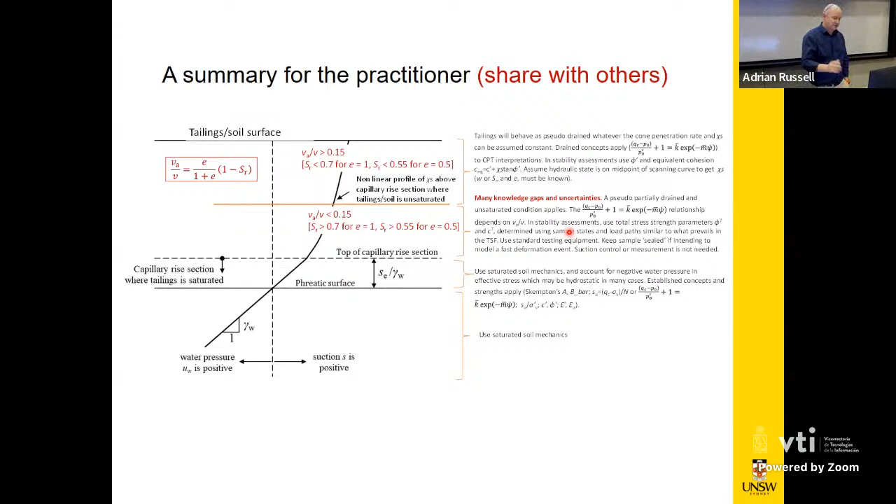Make sure that the initial states of your samples are similar to what you expect in the tailings, and that the load paths you apply are similar to what you expect in the tailings, because these phi and C terms depend very much on those two things. Don't use concepts of undrained shear strength ratios, etc. They have no meaning in these unsaturated sections.

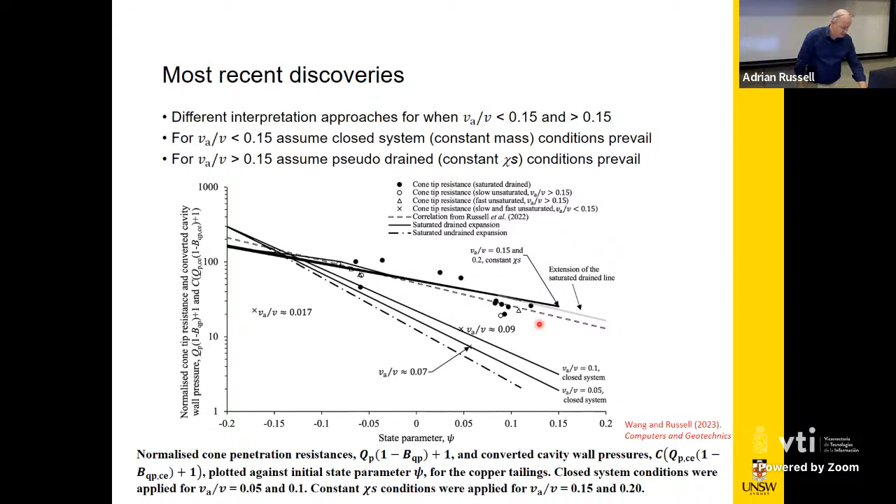Partial saturation has a lot of similarities to partial drainage in a saturated case. That's because with partial saturation, you get a little bit of volume change, but not as much as you do if it was fully drained. And same with partial drainage—you get a little bit of volume change, but not as much as you do if it was fully drained.

And I've shown this using some cavity expansion work, how you can have, for example, a very low velocity of your cone giving drained conditions, a very large velocity giving undrained conditions, and it will transition from one to the other with partial drainage—much in the same way as it does with progressively adding more and more air to an unsaturated material.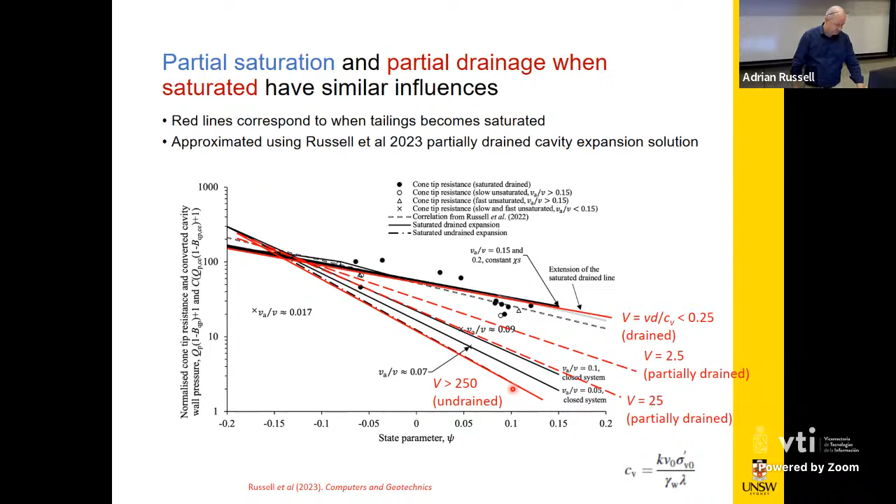So this is what we're working on now, to come up with some simple tricks to establish a K bar and an M bar that you can then use in your screening level assessments of a tailings dam. If you know your non-dimensional velocity, for example, or your volume of air relative to the total volume, these are the types of responses you'll see for saturated drains, or when you've got very small volumes of air, you've got your K bar and M bar being equal to this for large volumes of air. You've got your K bar and M bar being equal to your drained values, which you can recover from the Jefferies and Been charts. But as your non-dimensional velocity increases or the volume of air reduces, the K bar and M bar change very much and eventually approach the saturated undrained values at large values.

So we just need to populate this chart with some real data. This is essentially a theoretical prediction at the moment, but this is what we're working on right now and what the future of CPT interpretation may look like.

From the work of Arturo's work, we've tested about 5 tailings now. I just need to put it all together. Still in the middle of it, let's say.

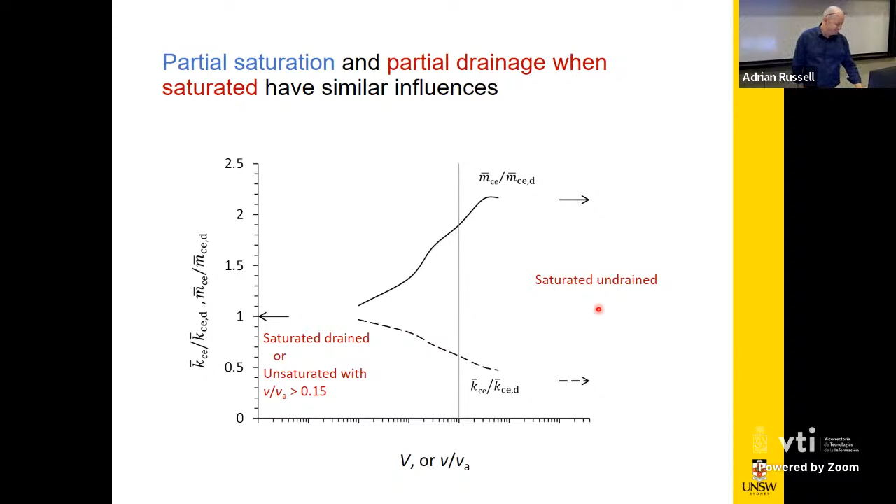Another couple of things to be wary of is the use of the widget, which is becoming fairly common now in practice. It has built into it a correction factor which converts a normalized cone cavity expansion result to a normalized cone resistance. The factor is around 2 inside that widget, but my experience is that correction factor is a bit too small. I'm seeing numbers closer to 4 or 8. So your widget can underpredict what your cone resistance might be. Just be really careful of that.

This is where I've plotted normalized cone resistance against cavity wall pressures using real data, and the ratio is 6.3 in this case. Another thing to be wary of is that the widget outputs contain errors as large as 10%. I'm not exactly sure why that is. It might be something to do with the numerical tolerances inside it, or the fact that it's expanding a cavity that doesn't start from zero. I'm not familiar, but it could be something like that that causes these errors.

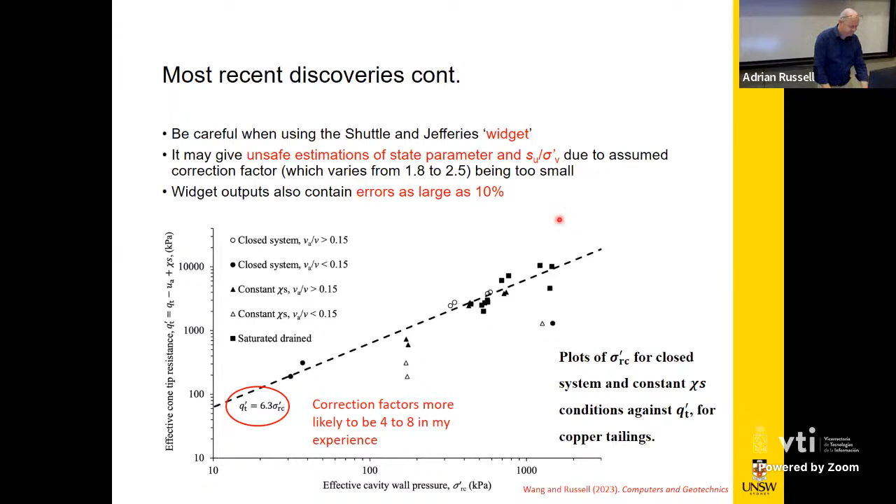Anyway, so look, this is getting into summary and conclusions now. As people apply unsaturated soil mechanics, they're doing some really good things. They're determining the water retention curves, usually by engaging universities. Really smart, you need that all the time.

And people are using this equivalent cohesion. It's been around for a while. It's not a new concept, but there's also equivalent unit weight that perhaps people are less familiar with that should also be used if you've got a steep gradient of your suction.

People are also making a lot of mistakes. They're mistaking total suction with matric suction. And this is an area that needs a lot more research, but total suction is osmotic plus matric, and the osmotic part acts very differently. It acts on the clay minerals and changes diffuse double layers and things, and that does not always cause a mechanical change to the material in the same way a matric suction does. So just be really careful not to get off track there.

Not understanding hydraulic hysteresis is a big one. Soils and tailings have a distinct drying curve and wetting curve. But often a practitioner says, lab, please generate the drying curve. Great, got it. Now I'm going to apply it to a wetting event. Wrong. You need the wetting curve for a wetting event, okay? Or something in between if you're hovering between drying and wetting processes. So get that part sorted out as well.

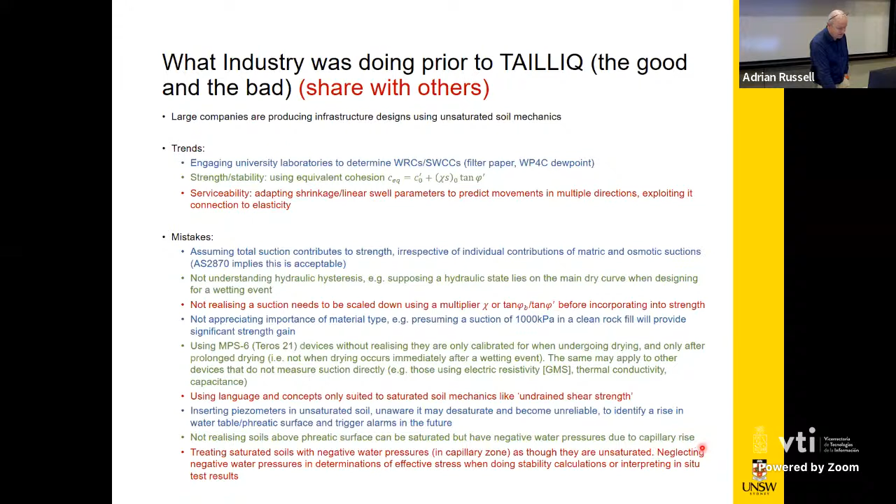And ignoring capillary rise, I think it's not something we should do. We should try and put it in if we can. And some of the things just to be looking out for as a practitioner.

Key messages: equivalent cohesion, unit weights. Proceed with designs using total stress. Great to do in software.

What else is the key message here? The volume of air relative to the total volume is key. If it's larger than 15%, drained conditions prevail. If it's less than that, it's a bit tricky when we use this kind of total stress strength parameters.

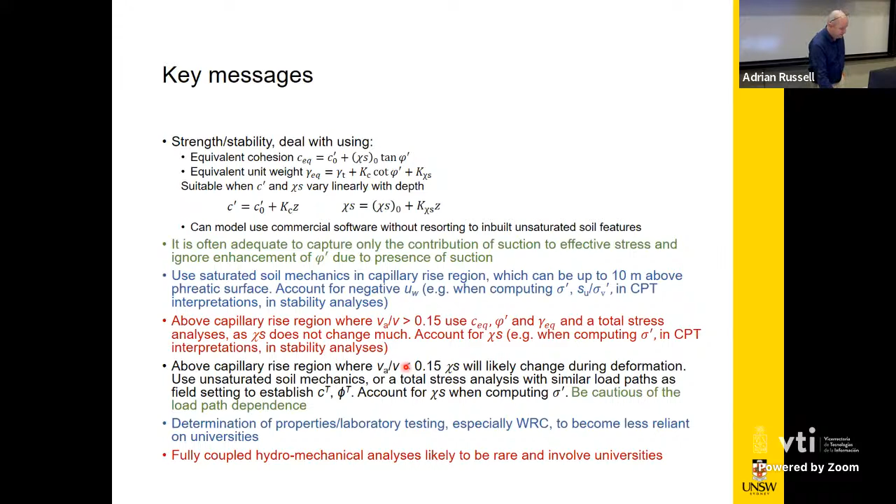There's an interesting one here by Arturo Jimenez and myself, where for fractal materials, we relate the water retention curve to simple parameters extracted from the particle size distribution. That can avoid time-consuming lab testing. And because I'm in Santiago, and Santiago is gravel, I've used that Jimenez and Russell procedure to estimate the water retention curve for Santiago gravel.

So here we go. I've assumed 3% clay and a void ratio of 0.254. I have no idea how accurate these are, but from one paper I saw, it had a dry density giving a unit weight of 21, and that gives that void ratio.

So then for a moisture content of 5% and a friction angle of 45 degrees, I get a chi-S of 21 kilopascals, and an equivalent cohesion of also 21 kilopascals.

Now, this is due to capillary effects. This is added on to the saturated cohesion, if there is such a thing.

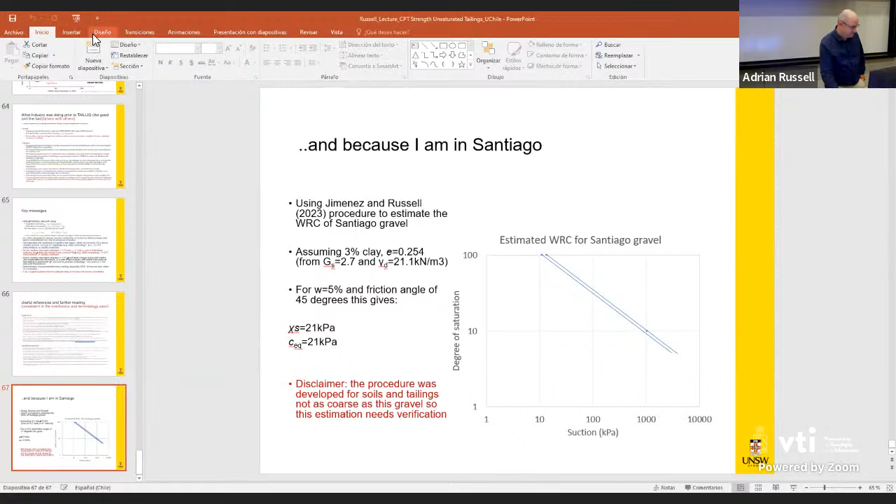It's like everything is super. I don't know if there's two, maybe three chats on there. I don't know if they're questions. How do we see those? How do we go to Zoom? Here we go. How do I? Oh, here we go. Someone wants to see the references again—yeah, the reference, they're asking for that. So if you email me directly, I can send you the list or the presentation, can't read those others. I think they're just saying, take off the mute, and thank you. Okay, right, we are done.

We're done. Yeah, thank you very much, Adrian. Great presentation, thank you. It's a whole new world. A whole new world, yeah. Unsaturated soil mechanics—and a lot of fun. A lot of fun.